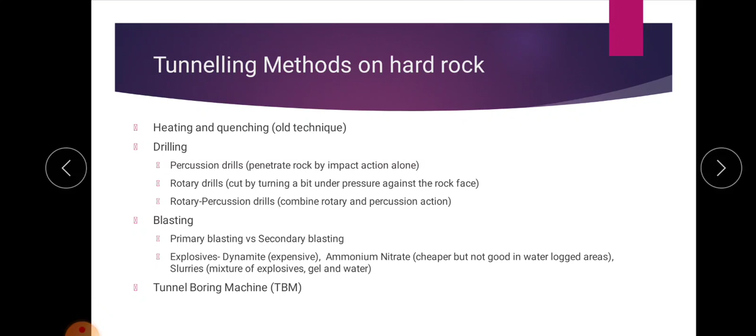Morning students. So we have studied different tunneling methods, and in order to tunnel through hard rock, we use a machine known as the tunnel boring machine, or TBM.

This tunnel boring machine is used to excavate tunnels with a circular cross section through a variety of soil and rock strata. It can be used for any type of soil, and the tunnel diameter can range up to 19.25 meters. That is, we can excavate a tunnel up to 19.25 meters in diameter using a TBM.

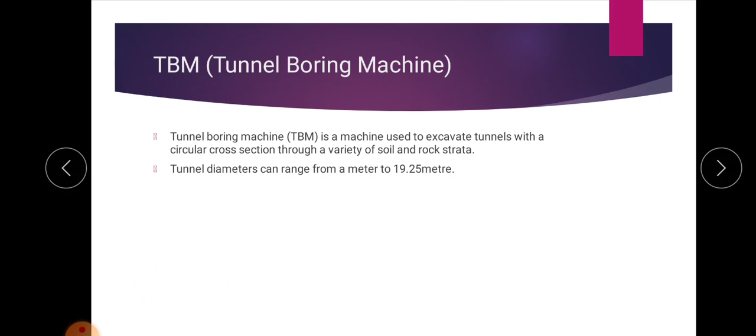Before using the TBM, we first have to do drilling and blasting, because excavating using the TBM alone will be very costly. So initially we do the drilling and blasting process through the hard rock. In some cases digging will not be possible, so at that point we adopt the drilling and blasting process, while for soft soil we can use the digging process.

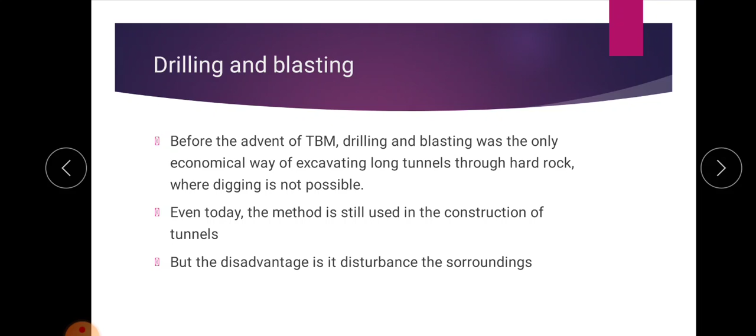Even today this method is still used in construction of tunnels, but the main disadvantage is that it will disturb the surroundings.

This figure shows how we carry out the drilling and blasting process. For this cross section, we first do the blasting for one area, then it continues for the next area, and this continues for the whole section until we drill the whole area.

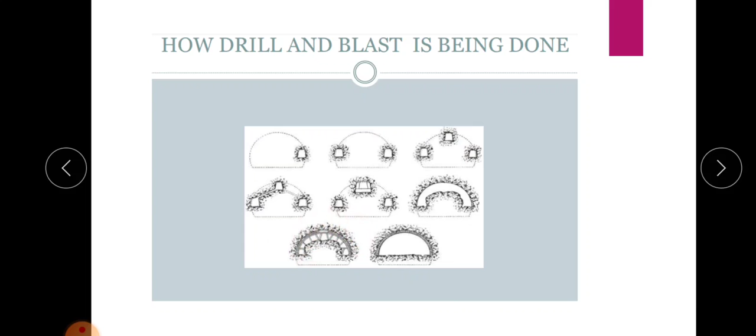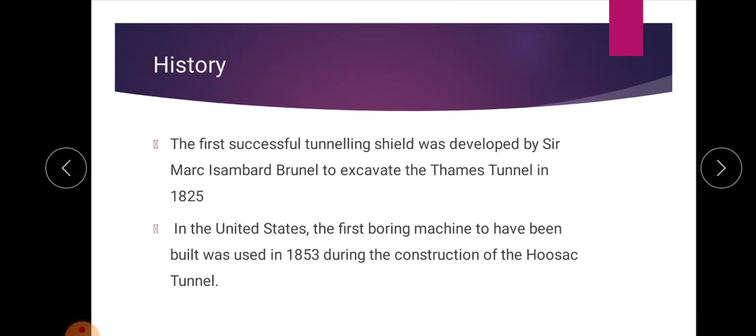The first successful tunneling shield was developed by Sir Marc Isambard Brunel to excavate the Thames Tunnel in 1825. In the US, the first boring machine was built in 1853 during the construction of the Hoosac Tunnel.

This figure shows the main parts of a TBM. There is a rotating disc with cutting teeth, and the function of this part is to cut the rock into pieces. Using the sharp edge of this cutting teeth, we can cut the rock into smaller pieces.

Next is the conveyor belt, one of the important parts, which removes the rock pieces to the backside. Using this conveyor belt, the rock pieces are carried to the back of the TBM. There is also a gripper ram, that is, hydraulic feet, in order to grip the sides of the tunnel, and it pushes the machine in the forward direction.

So these are the main important parts: there is a scraper, and a thrust ram in order to give the thrust for the movement. These are the main parts of the TBM.

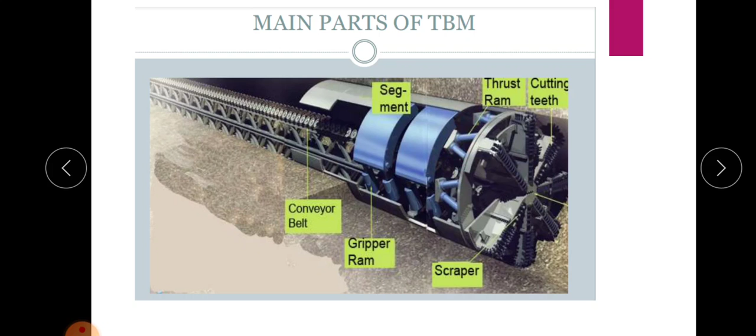We can see a video which shows the working of this TBM.

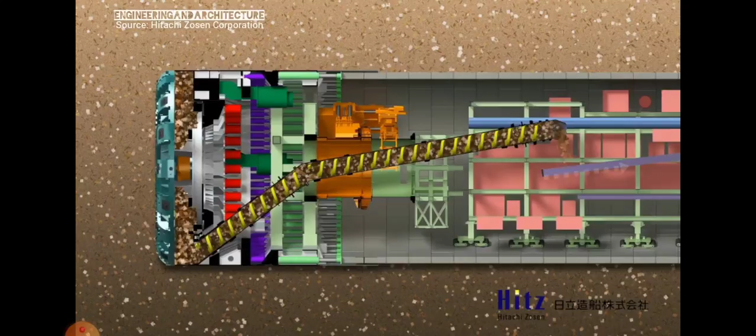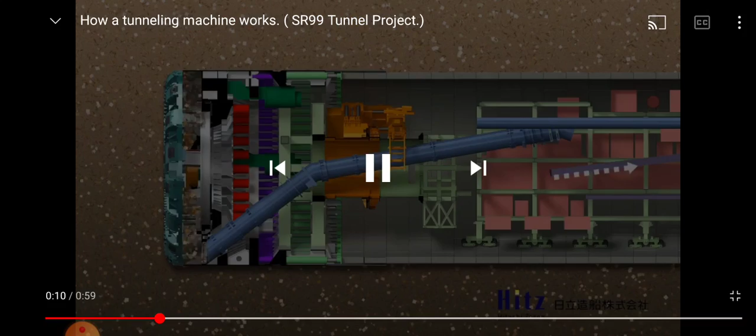This is the conveyor belt. Through the rotation of the rotating disc which has cutting teeth, it breaks the rock into smaller pieces. This cutting edge makes the rock into small pieces, and these rock pieces are carried through the conveyor belt towards the back side.

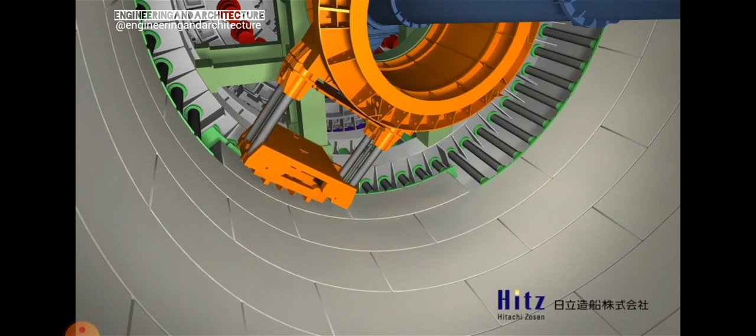This figure shows the hydraulic feet, which provide grip to the sides of the tunnel. Using this equipment, the TBM machine is pushed in the forward direction. So this is actually the hydraulic feet which provide grip and push the machine forward. This is about the working of the tunnel boring machine.

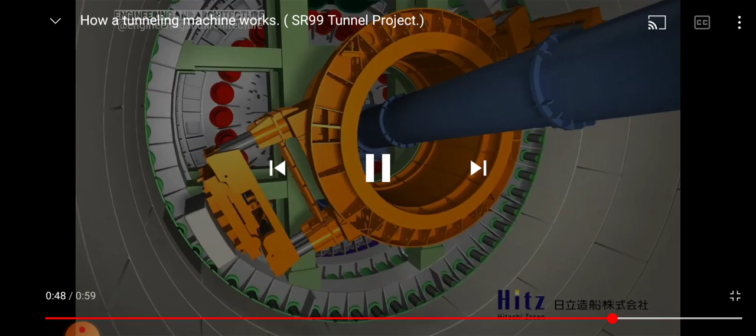The working of TBM: TBM is shaped like a tube, and at the front there is a rotating disc with cutting edges that can shear through the rock. The rock breaks into smaller pieces using these cutting teeth, and the pulverized rock falls onto a conveyor belt, which carries it to the back of the TBM and out to the outside.

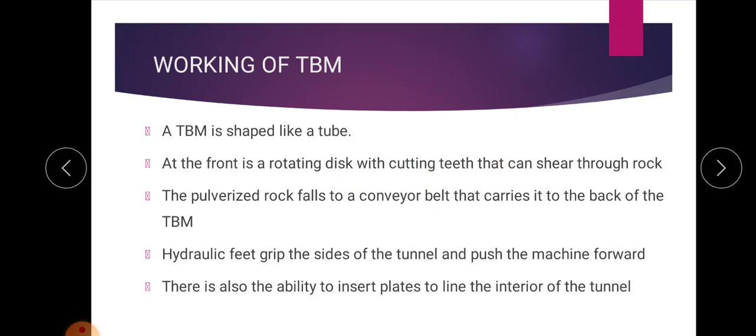Hydraulic feet grip the sides of the tunnel and push the machine forward. There is also the ability to insert plates to line the interior of the tunnel. Since we have to provide lining for the tunnel, there is additional equipment for providing this lining. This is about the tunnel boring machine.

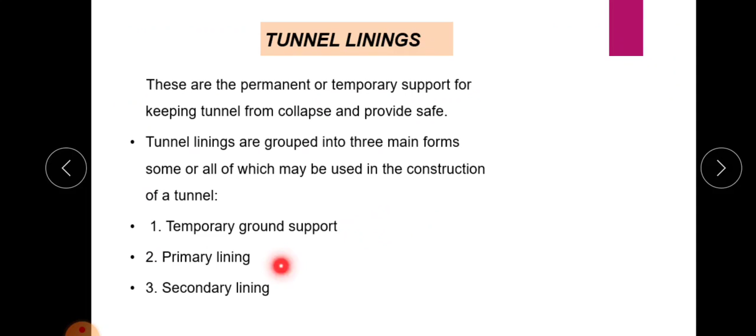Next is tunnel lining. Tunnel lining means permanent or temporary support for keeping the tunnel from collapse and providing safety. Tunnel linings are grouped into three types: temporary ground support, primary lining, and secondary lining. This tunnel lining gives a finishing touch to the tunnel cross section, which is its main function.

This lining will provide a finishing touch to the tunnel cross section. The most common materials used for lining are stone masonry, brick masonry, cement concrete, rubber, cast iron, and timber.

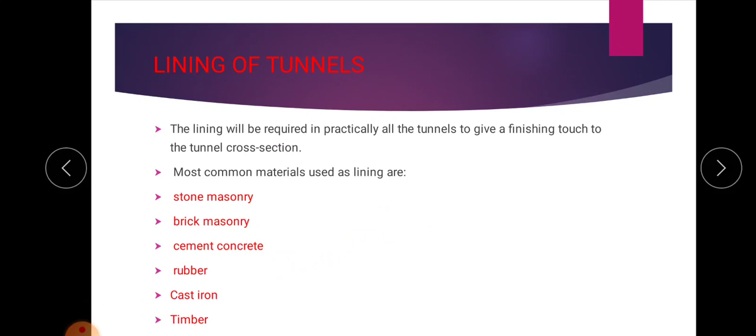The objectives of tunnel lining, that is why we do lining for tunnels: it gives correct section to the tunnel, keeps the inside of the tunnel free from water percolation, and forms a good protective covering preventing chemical action of water with certain types of rocks.

It prevents the reaction between the rock and certain chemicals, gives strength to weak sections, reduces the maintenance cost of the tunnel, and provides neatness and cleanliness. So these are the functions of tunnel lining.

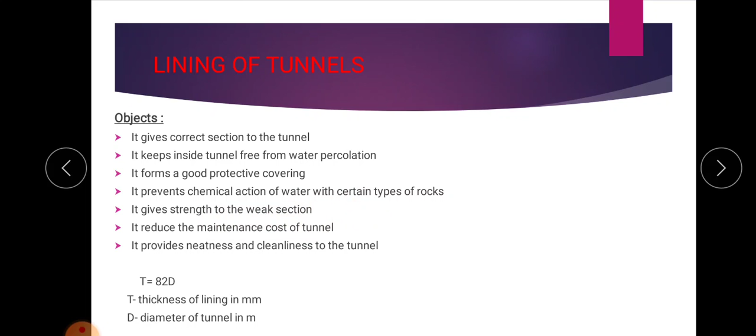Usually the thickness of the tunnel lining is given by the equation: thickness T equals 82 times the diameter of the tunnel. By using this equation, we fix the thickness of the lining that has to be provided for the tunnel. In rocky ground, the lining can be carried out by any of the following ways.

First is invert first, then sides, then top. That is, we first provide lining for the invert portion, then the sides, and then the top.

In the second method, we give lining for the side walls first, then the arch section, then the invert portion. In some cases we provide lining for the full section in one single operation. So in one method we provide lining for the invert first, then sides, then top.

In the second method we provide lining for the side wall first, then the arch section, and finally the invert. In the third method we provide lining for the full section in a single operation. This is the procedure of tunneling in rocky ground.

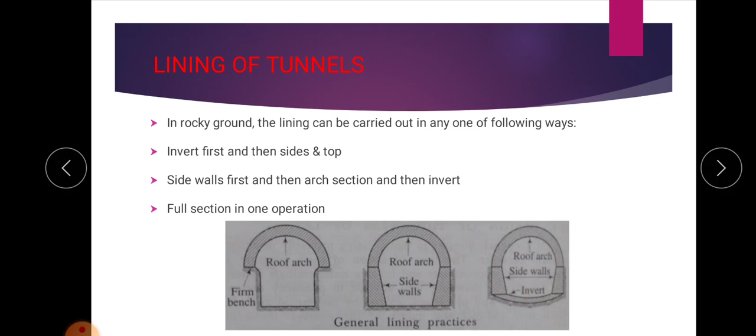The common types of tunnel support used in tunnels: natural support and rock. When the tunnel is being bored through good quality rock with high resistance, we can provide lining by the rock itself.

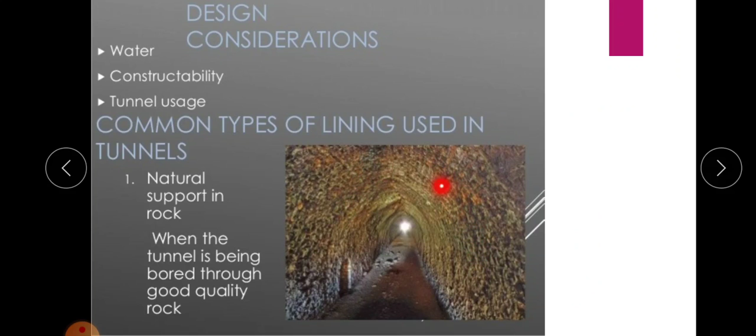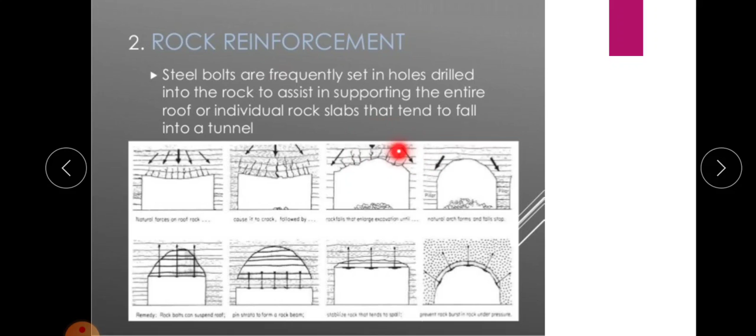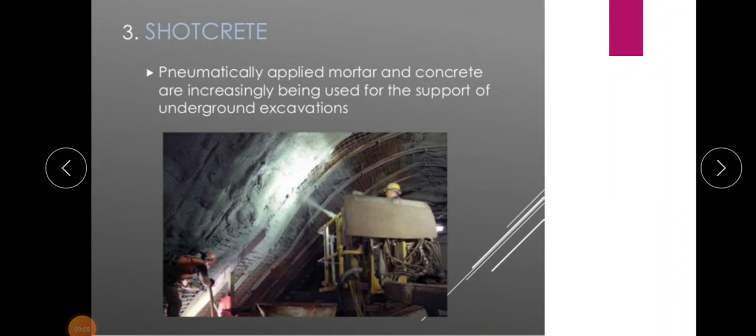So this is about the lining of tunnels. Next, I will discuss ventilation and lighting in the next class.